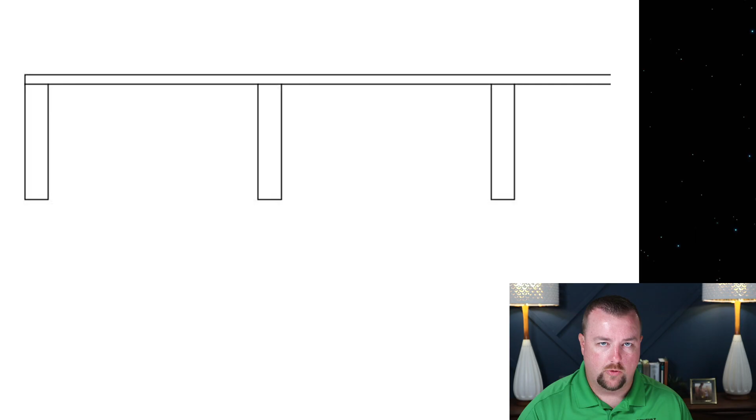So in this picture, we show typical columns and a slab spanning across the columns. This is kind of how it would be drawn on the drawings. Of course, I have no notes, no additional information. This is a very simple structure that I'm showing you. Now, as a load is applied to this, and we draw that load with arrows, meaning that gravity is pulling that load down, as a load is applied, that slab will deflect.

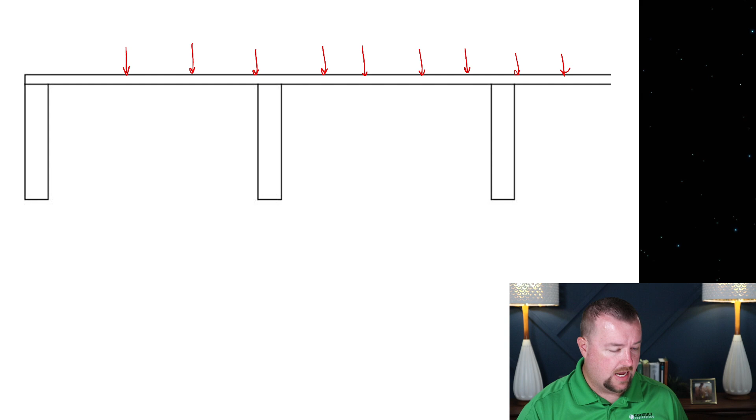Now this picture is sort of an over-exaggeration of how it would deflect, but we do this in order to make it visible and understand the principles that are involved. So when it deflects like this, you have to think of concrete as a very stiff material. It doesn't like to deflect. It doesn't like to stretch. And so in the top here, the concrete is pushing in on itself, and we call that compression, but in the bottom, it's stretching apart. We call that a tension force.

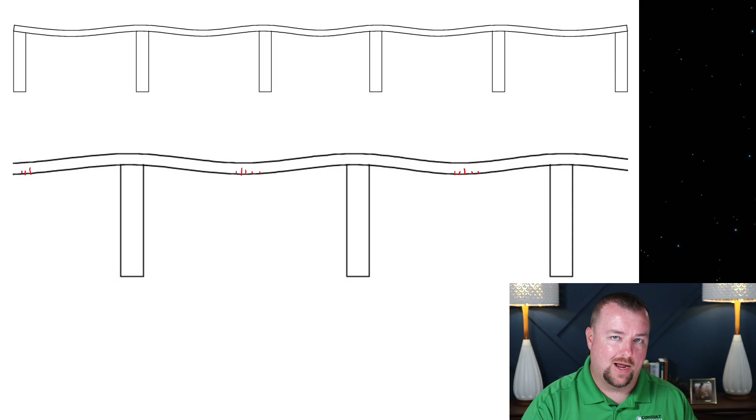So in a slab like this, the bottom of the slab would crack, and it might have cracks that look like that. At the bottom of each one, you'd have these series of cracks in the bottom of the slab. But the slab should be designed to not crack. There's an old adage where people say, well, concrete's supposed to crack. But the reality is that concrete is designed to resist cracking or control cracking. And if it cracks, it needs to be explained why it's cracking and why that cracking occurs.

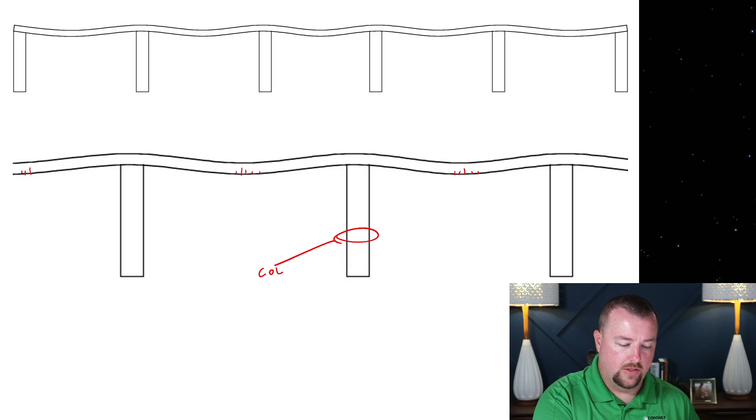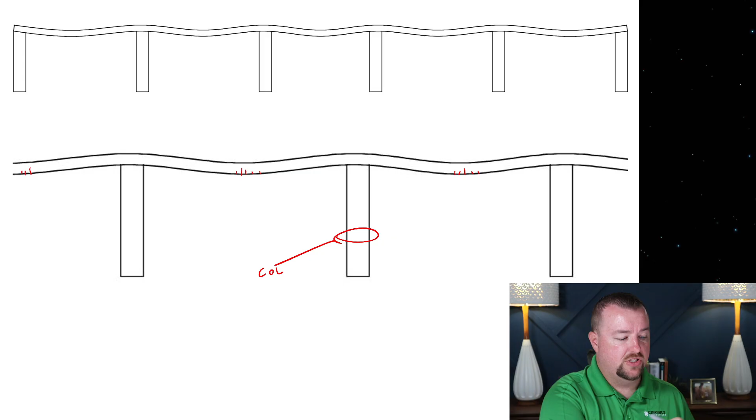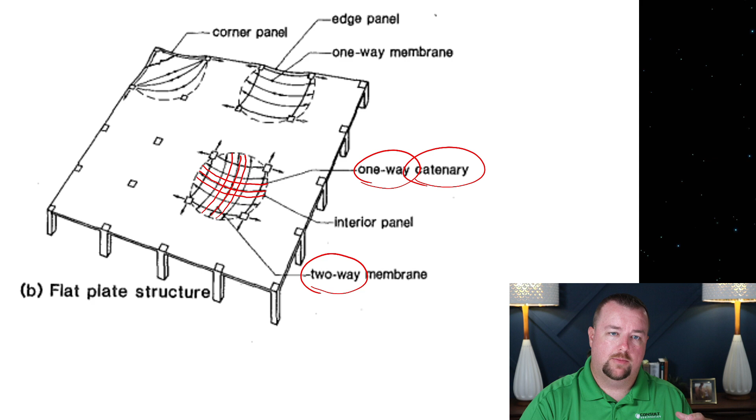And what this creates is that when this slab sags in both directions, in what we call a two-way action. Don't worry about the one-way, don't worry about the catenary right now. I'm sure you've heard catenary action mentioned in other videos, and I'm going to do a video on that in the future. But right now we're talking about two-way action and two-way membranes. When a flat plate construction becomes overstressed, it will actually crack in diagonals.

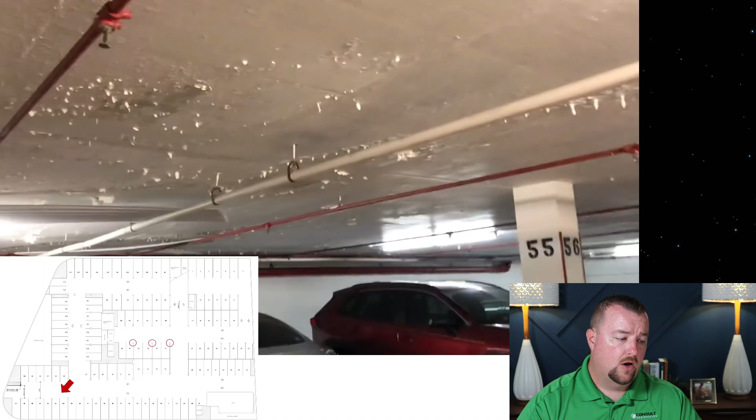So here we're looking now at parking spaces 55 and 56, and I wanted to point out, you can see all these things sticking out from the ceiling, and a closer view of those is here. All right, now I want to explain what you're looking at because there's three different things here. When you see these white flecks like around this area, you're actually looking at paint that is peeling off of the ceiling. You can see a little bit of paint peeling here, and back here quite a bit of paint peeling and elsewhere around here, okay? So these are locations of peeling paint.

Now, the other thing that you'll see is these evenly spaced white dots, and these white lines here. And what these are is injection ports that were left there. It's part of a practice when you want to inject a crack, either with epoxy, or maybe with a urethane to try to stop the water from leaking in. You're going to install these plastic ports, and then use them as injection spots in order to inject your product into the concrete cracks. And what happened in this case, and what I see a lot of times with contractors, is they never got rid of the ports.

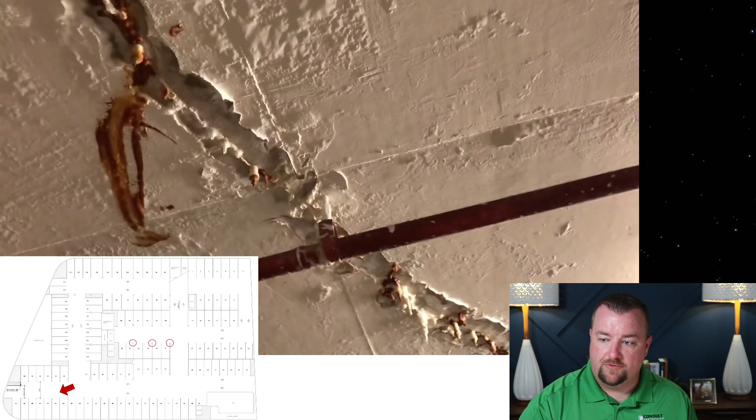But not all of this dimpling and these artifacts can be described as ports. In this area that I've just circled, it appears to be more like stalactites, which you'll see later on in this video. But you can see this ceiling has generally got a lot going on, right? Okay, and as you look up from that last camera position, when she looks straight up, you can actually see the injection port here, okay? And you can see the injection ports down here. But between the injection ports, you can actually see stalactites. So here's some stalactites, here's some stalactites.

And the way you get those stalactites is water has to come from the top through the concrete. It pulls the calcium out of the concrete. It's a bit of a longer chemical process, but ultimately it ends up forming what's called calcium carbonate, which is this white powdery stuff that forms these stalactites at the ceiling.

Okay, the other thing to note in this picture is it looks like we have discolorations which appear to be rust. Given that this interesting object here is sort of hanging down, and it doesn't make a lot of sense to a lot of people, what this tells me, especially looking at the rust color at this port right here, is that this was a location that was probably injected with urethane.

Which was not effective. And so as the water keeps coming through and keeps rusting the steel, it actually colors the urethane. It can almost be like a sealant or a foam type material. It looks like it discolored it, and some of that urethane maybe has fallen down and is hanging from the ceiling. At this point, that's just my best guess, but this does not look reminiscent of an epoxy injection to me. It looks more like a urethane injection, but pretty ugly.

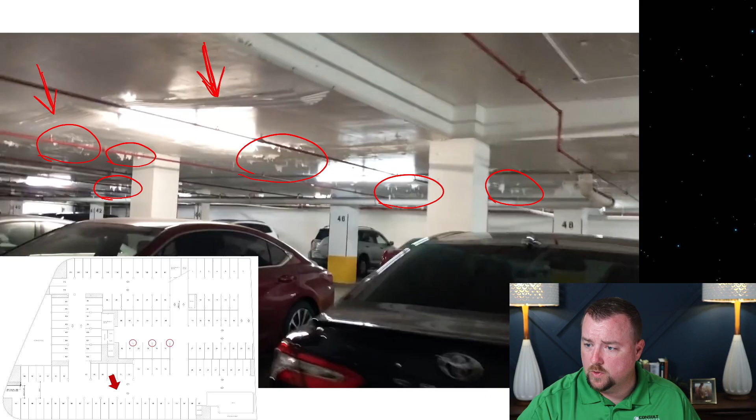Okay, so now we start heading toward the area of the building that collapsed. If you look down in your key, I will draw roughly the building collapsed something like this, and then it kind of went around the pool, and that is your area of collapse. So now you can see where the red arrow is, that we are beginning to walk into that area and look that way. Now you can only see column 2, and you can see column 1, okay?

But what's interesting is now you can begin to see here's that corrugated plastic again. We can't really see where it's at. We'll pick that up in the next frame, but again, we're moving on down. This white Jeep here is actually parked in parking space 77, so it's parked right here, just to kind of give you guys an orientation. So your ramp is just beyond, and again, these three circles here are indicating the columns that we suspect would have had to have gone.

She turns a little bit to the right, that picks up column 3, and then you can still see column 2 and 1 in her vision. Actually, no, I'm sorry, this is column 2. So she stepped forward, and this is column 2, and this is now column 1. And then here you can see that corrugated plastic. And notice the orientation of the corrugated plastic, okay?

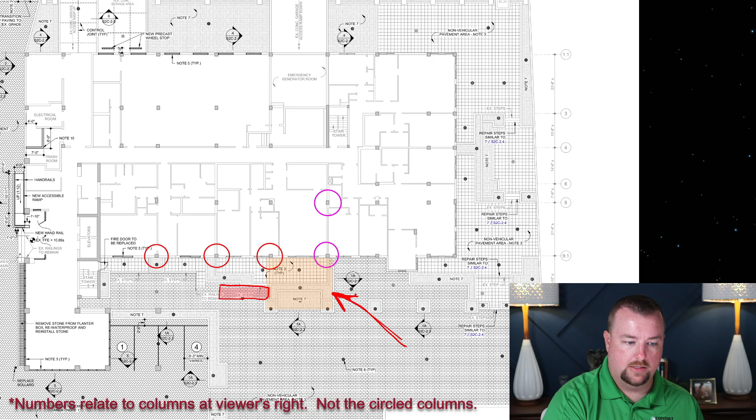And so that's really interesting, because what that tells me is if I've got this plastic and it's perpendicular to the line of the beams, okay, the beams are right here. So if it's perpendicular to the line of the beams and it's located where it's located, and you look at it on the plans and you transpose that, well, that's right where the deck meets the planter box. Okay, so you can see that. So this is deck here, and then this is one of your planter boxes right here. So that crack is right where the deck meets the planter box.

That's interesting, and that's something that will be useful as the forensic engineers that are really on site and really doing this. They will use this video, and trust me, they will use that piece of information. Again, you can't draw a conclusion from that piece of information, but it's like another piece to the puzzle, right? And we're trying to solve the puzzle. That's what they will be trying to do.

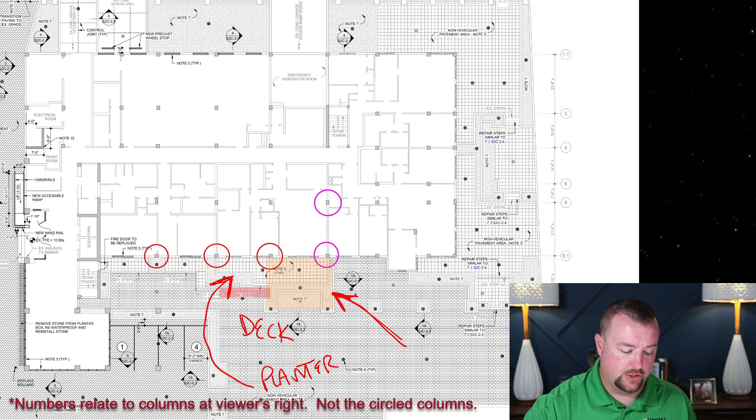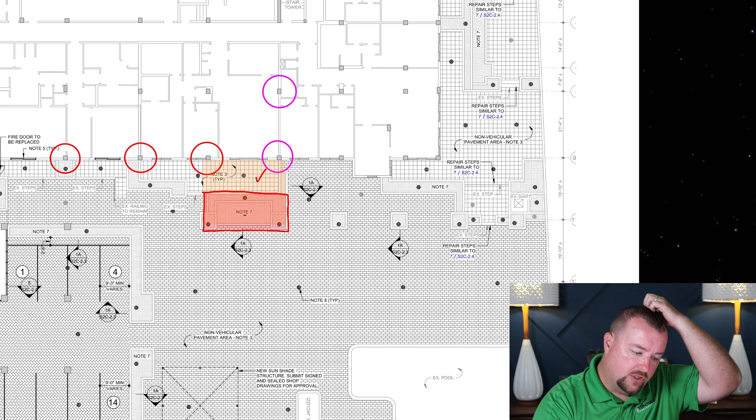And if you transpose that area onto the area of debris that fell, that is this reddish or pinkish rectangle here that I just circled on the drawing. That location is the location that is this, right? And then over here where it looks pretty good, this area is this area over here. And so you can see that there's a transition here between the planters, which are located here, and the upper level of the deck, which is up here.

So there's this transition point right along here where it drops down, and it looks relatively good to the north, and it doesn't look so great to the south. And the reason why this is important is because, again, this whole area above that's in this picture is the area that collapsed. And so you can see that there were some serious problems going on with the planters in this area.

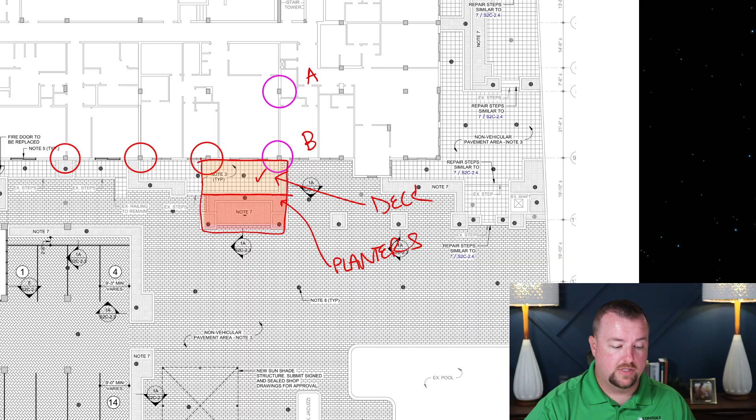So this is your debris area. There's your column A, there's your column B. And if you transpose that onto the drawing, here's your column A, here's your column B, and here is your debris area. As I've said in the previous video, more than this might have fallen before the rest of the building collapsed. But the only thing we can confirm from this video is that this area of debris on the ground, the concrete that has fallen, generally correlates to this area right here.

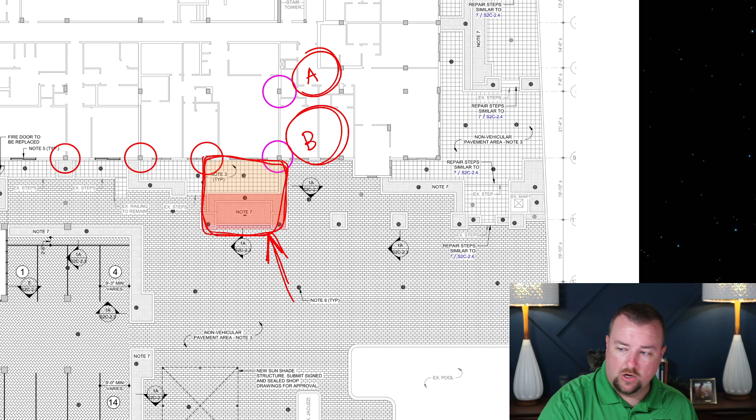And this is something nobody has really talked about much yet. We've been talking basically from the garage up to the planter deck. Why did the planter deck collapse? How did the building collapse? Was it catenary action? All these ideas and theories being proffered out there. But nobody has really talked about the foundation of the building.